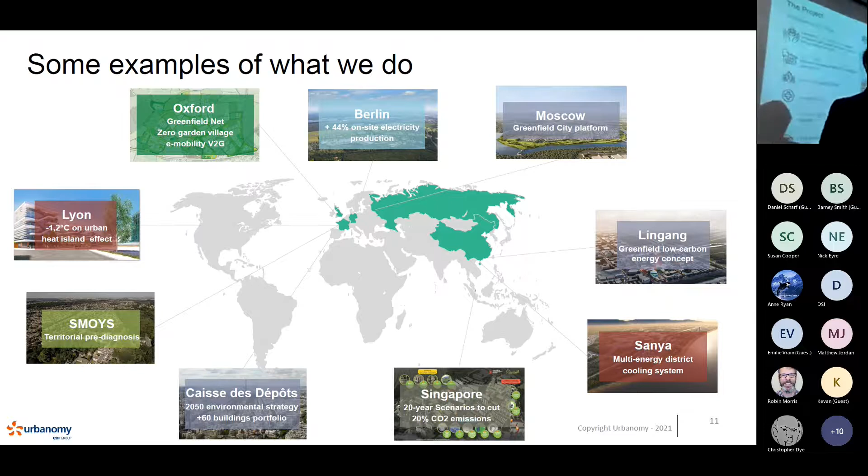So today, I'm going to talk about this Salt Cross Garden Village project, which is a great development in Eynsham, in West Oxfordshire, which is part of the Smart and Fair Futures, which is led by the Low Carbon Hub as part of the LEO project. This project is going to be 2,200 new homes. It's going to be mixed use with also 2 schools, a health center, a large-scale science park, so 40 hectares, and beside the development, there will be also park and ride to support the connection with buses and public transportation on the A40.

The ambition of Salt Cross Garden Village has been driven by West Oxfordshire District Council through a draft area action plan, which is under review and validation at the moment. The ambition is really to make it a net zero development, so to have low energy use in the building, to maximize the production of local renewables, and as well to have zero fossil fuel burned on site.

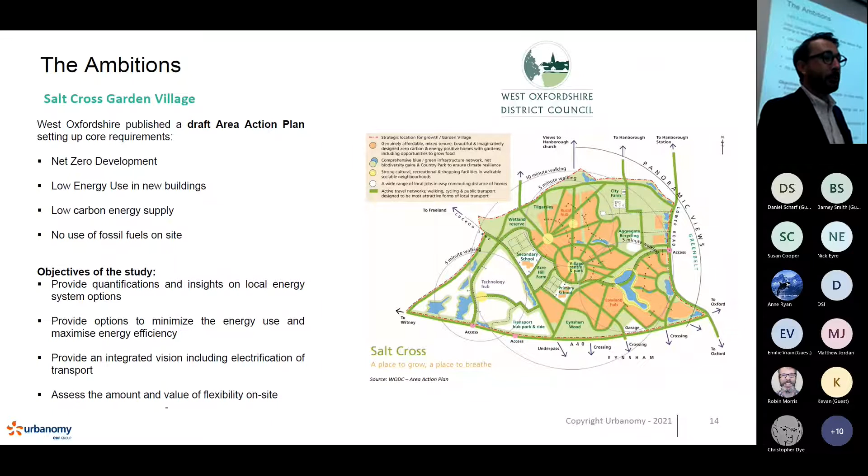The objective of the study is then to provide some insights and quantifications to achieve this objective through various options on the local energy system, to provide options to maximize the use of local renewables, and to develop efficient building and mobility solutions, low carbon solutions, and to assess the amount of flexibility that we can get through various assets on the site. The idea is really to look at the whole value chain of energy and mobility at this early stage of the development, to provide all the insights to make sure that the objective of having a net zero development is achieved.

So this study is part of the Local Energy Oxfordshire, the LEO project that you might know, which is led by Scottish and Southern Electricity Network, and among others with Oxfordshire County Council, the University of Oxford, and the Low Carbon Hub. And as part of this project, the Low Carbon Hub has developed the Eynsham Smart and Fair Futures, which is a project to ensure that the objectives of these developments are benefiting the community and the local environment.

So we've been working with this local group led by the Low Carbon Hub, and also with GreenTEA, so Eynsham Transition Energy Action, who is leading the local group and is very active in the review of the study, and also in the direction given for the study.

Now, to go down a bit to the methodology. This is the overview of the methodology that we've used for this project. So if we start from the top left, we have first assessed the future building energy needs. So looking at high efficiency building fabric and trying to get as much as possible from this early stage. So it means trying to get as low consumption and emission as possible from this stage.

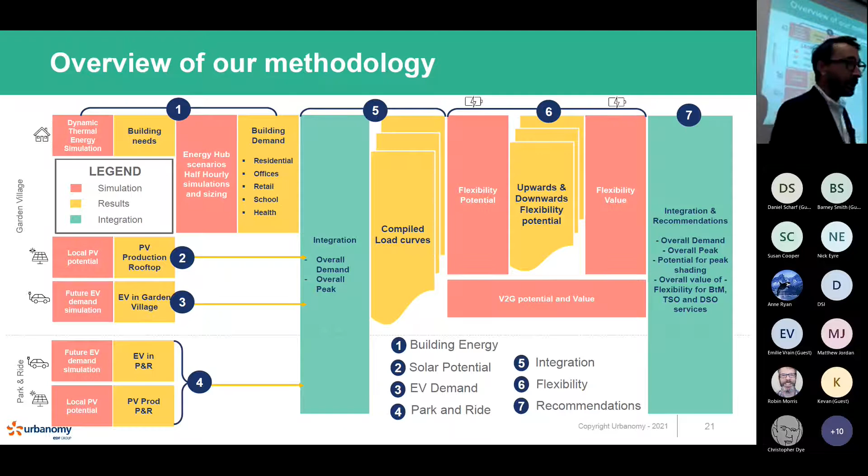Second stage will be to assess various energy hubs. So to cover these needs and to self-consume the energy, we've looked at 3 different scenarios that I will detail later to produce the heat and the electricity for these buildings and electric vehicles. Then from these 3 scenarios, we've integrated all the results to provide a compiled load curve. The idea is to have the overall yearly energy demand and the peak demand to understand what will be the potential impact on the local infrastructure.

And then going to flexibility for various assets. So we've assessed the flexibility in buildings through thermal storage and batteries, and also flexibility from the electric vehicles with V1G and V2G. And we've assessed the value of this flexibility to understand how flexibility can reduce the energy costs and potentially bring new revenues.

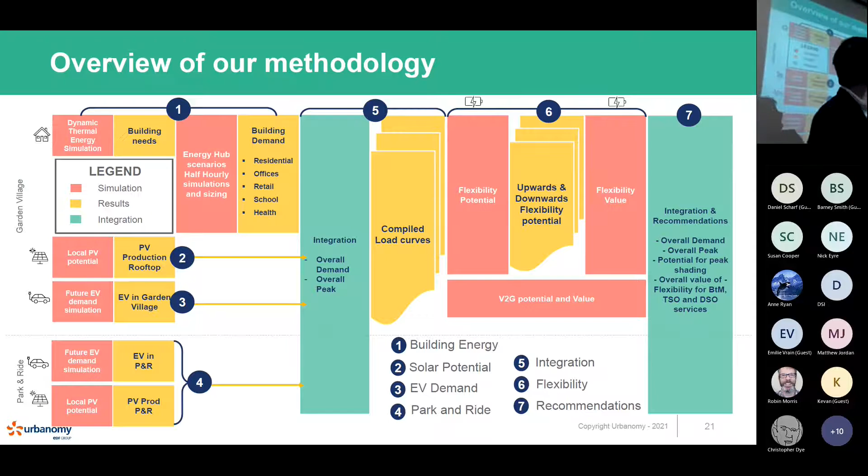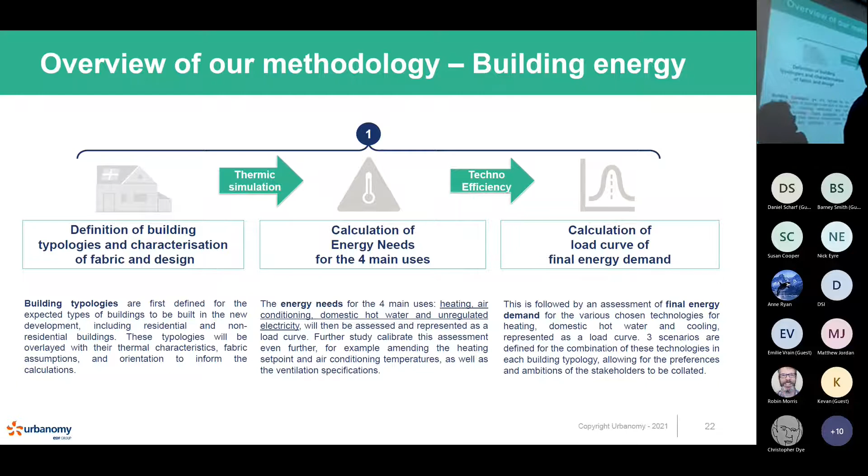So starting with the description of the methodology on the building energy demand. As mentioned, we've started with evaluating the building energy need with the definition of various typologies within the area. There are 2,200 homes with different typologies, so mid-rise and terraced houses, and also several retail, schools, and health centers. Then we've evaluated these energy needs through dynamic thermal simulations and the energy demand with the 3 scenarios that I mentioned earlier with centralized and decentralized solutions.

For the electric vehicles, we've assessed first what will be the need for EV charging infrastructure. So how many charge points will we have in this development, and how much energy will this demand require? We've used several load curves from charge points that EDF is operating to assess real values of the EV demand. Then we've simulated the park and ride, so trying to understand how much the electric vehicle demand will be covered by the solar canopy. And finally, we've done an assessment on V1G and V2G to understand how to optimize the charge of electric vehicles and provide new revenues.

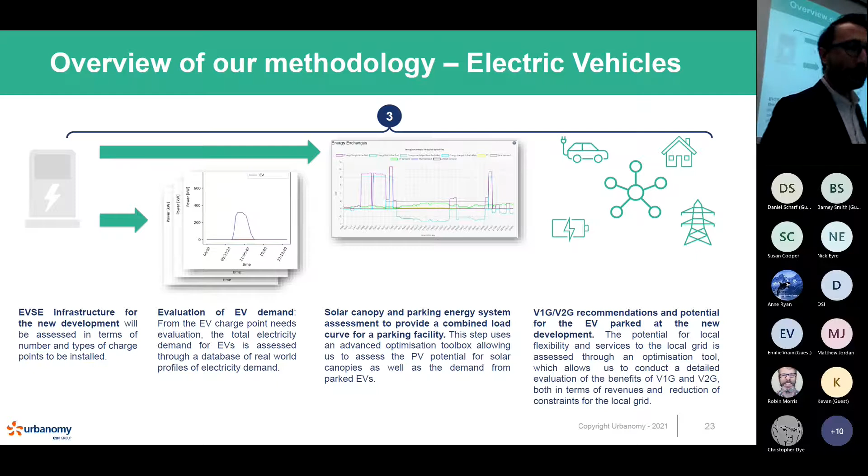Talking about flexibility, we've looked also at flexibility in the buildings using a toolbox that we've used for smart local energy system on several projects. The idea here is to simulate every half an hour how much flexibility we can get from the heat pumps, the thermal storage, and residential batteries, and then quantify this flexibility over arbitrage and various grid services using an optimization tool which is based on the market data in the UK.

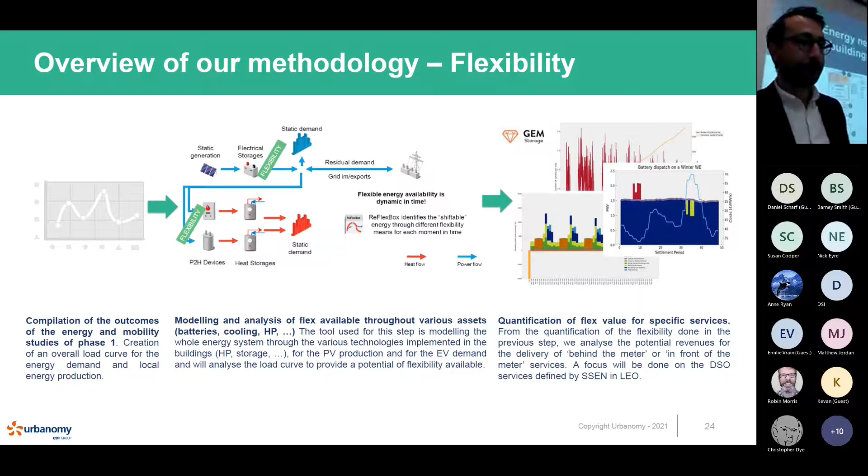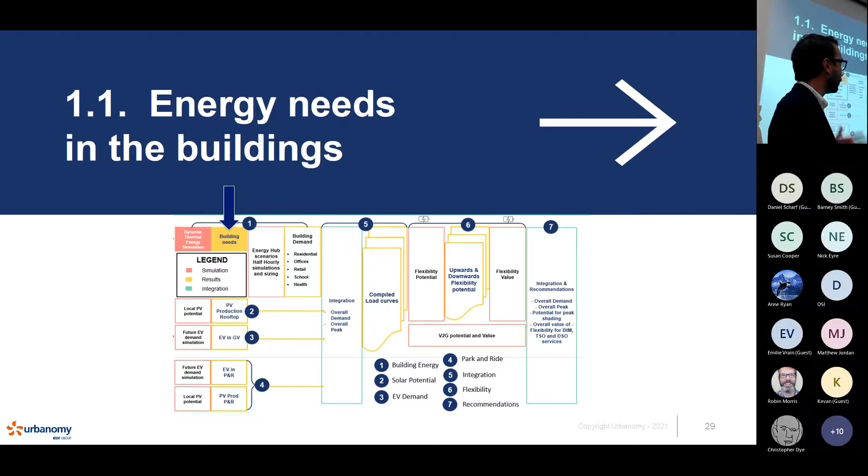So I'm going to go through these various steps, presenting you some results. The results will be evolving as the project evolves, because the design of the master plan will be evolving along the project. So what you see is a snapshot at the moment where we've done the simulation, and obviously we continue to work together with the local stakeholders to ensure that the evolution of the planning is going in the right direction.

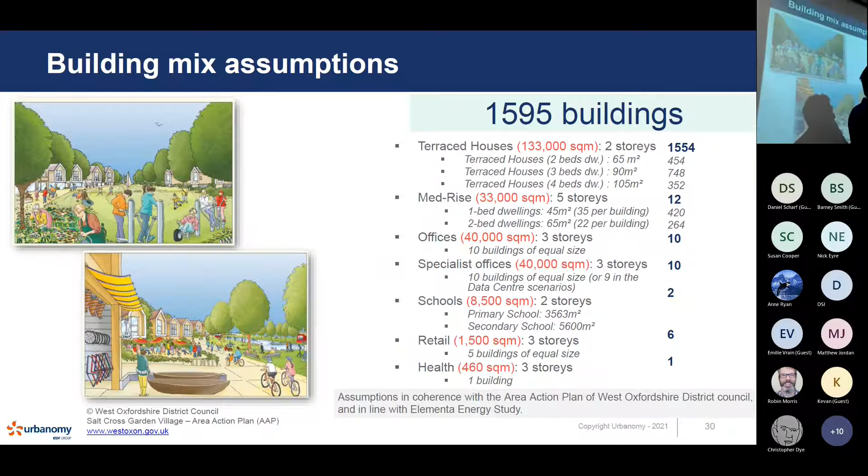Starting with the buildings, we have 1,595 buildings, mainly residential buildings, so terraced houses and a few mid-rise. Some offices and specialist offices. So what is a specialist office? We've separated half of the offices within the science park to assign them to a typology which is a little bit more related to labs and high computing needs. We have two schools, primary and secondary schools, retail buildings, and a health center.

We've worked on trying to get the highest efficiency in the building fabric, so pushing the U values and the efficiency of this building fabric to have the highest standard possible. In terms of heating system and domestic hot water system, we've looked at heat pumps and centralized or district heating systems. And for the modeling, we've adapted also to the UK context to understand how much domestic hot water is used, how much lighting and the various appliances are used in these various buildings.

AC is only used in offices and in the data center. We used semi-instantaneous domestic hot water, which means that we average over every half an hour. The need for domestic hot water is not always a whole half an hour, generally it's 2 to 15 minutes. So we average this, and we take local weather conditions from 2020.

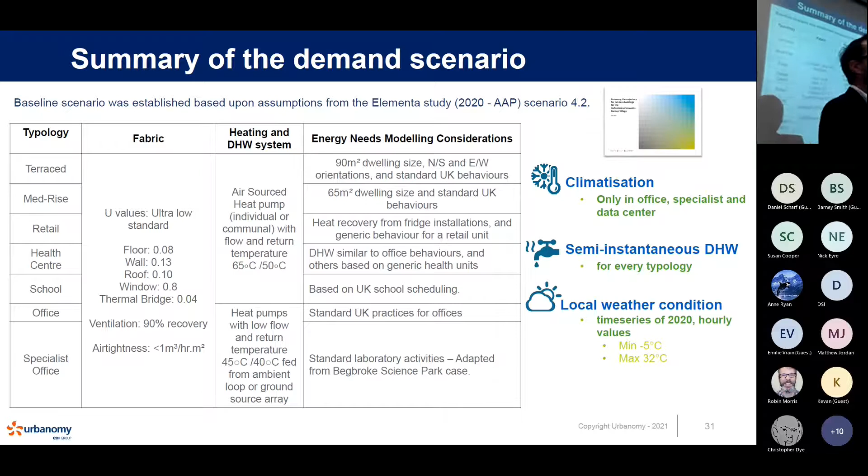We've been aligning our assumptions with the Elementa study, which is a previous study that had been conducted for the West Oxfordshire District Council, to ensure continuity in the studies and ensure that as we detail the studies for this development, we rely on the same assumptions.

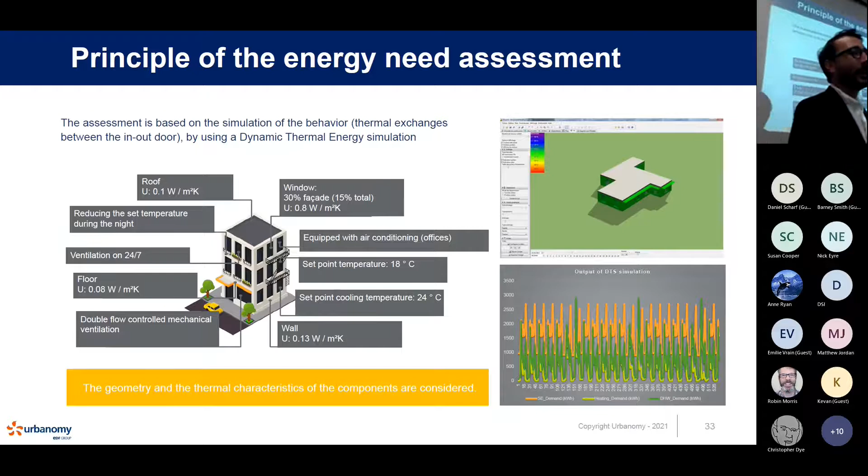For the energy needs, we've produced a dynamic thermal simulation, which takes into account the typologies and the form of the various buildings, the U values and the thermal bridges within these typologies. We've done a simulation every 30 minutes to have precision, and along a whole year to understand the seasonalities of the energy needs. And we come to these results. Overall, we have very low thermal needs. The thermal needs are for space heating and domestic hot water.

So for all the typologies, we are below 15 kilowatt hours per square meter per year. We see that this is the result of the very high standard of the building fabric, so it's a good sign. We see that the unregulated electricity is becoming a significant part of the needs, which was not the case with lower standards in the past. So we now need to focus a bit more on the unregulated electricity and on the efficiency of

the appliances. And one result is that we've done a scenario with a data center, which shows that the building needs for the data center are really high compared to the rest. And we've seen that it has a strong impact. And we'll also explain why we've simulated a data center.

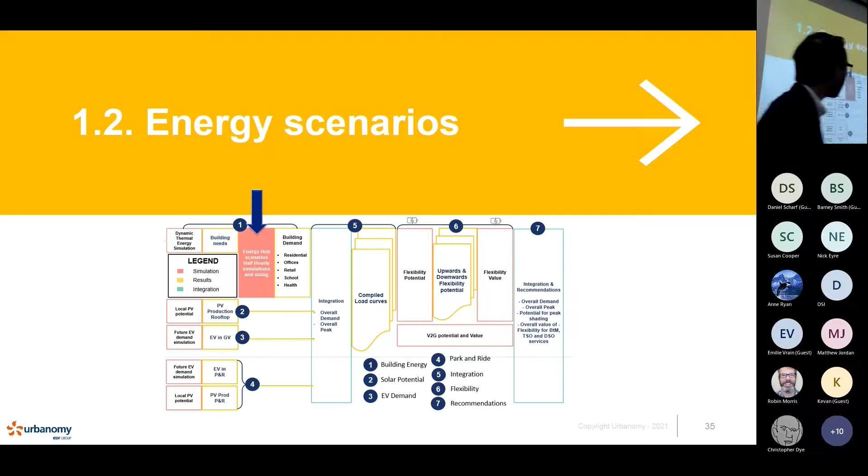So going to the scenarios, we've tested 3 energy hub scenarios: one fully decentralized with heat pumps on each building, one fully centralized with a 4th generation district heating, so a 65-70 degree loop, and an ambient loop at 20 degrees with additional water heat pumps on every building to top up the temperature.

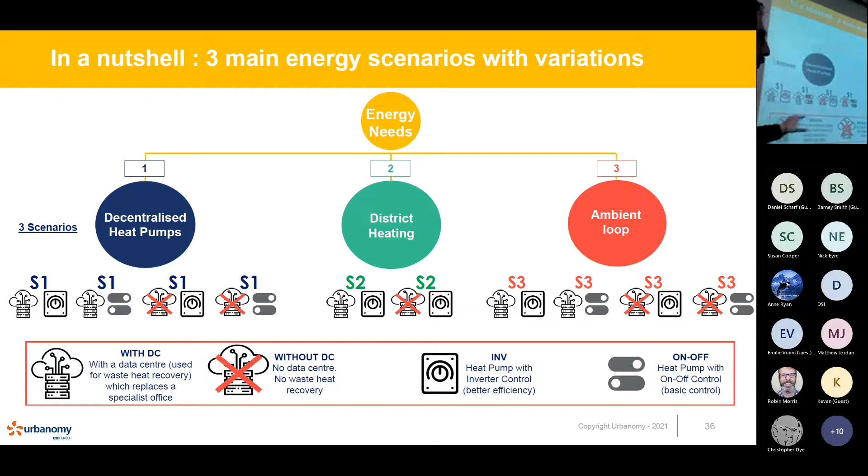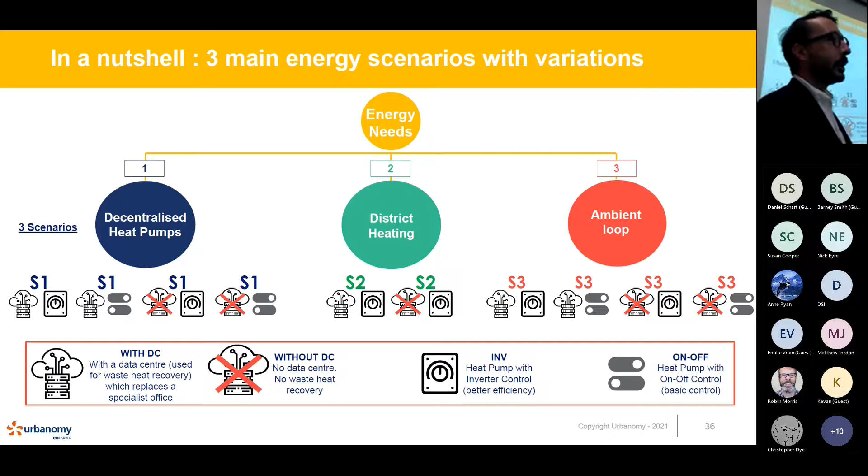We have then tested various options. The data center that I was mentioning. So the option of the data center was to test waste heat recovery from a data center. So is it worth installing a high computing building in this area to reuse the waste heat?

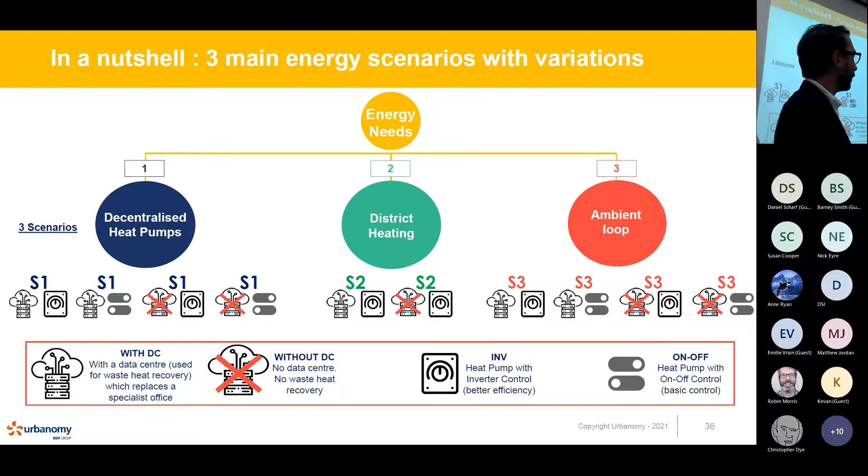And we've also tested two different controls of the heat pumps. The normal one, which is on-off, so the heat pump is running at the optimal power, and one with an inverter, which means that you can ramp up and ramp down the use of the heat pump, which is more efficient, and that we start to see in most, at least, of the air-water systems.

So, a short description of each of the scenarios. The first one is fully decentralized, fairly easy. We have air-water heat pumps for each of the buildings. Remember that the objective is not to burn any fossil fuel on site, so gas boilers or solutions with gas are not an option. We've also simulated PV on the roof of the buildings. We have thermal storage for domestic hot water and charge points.

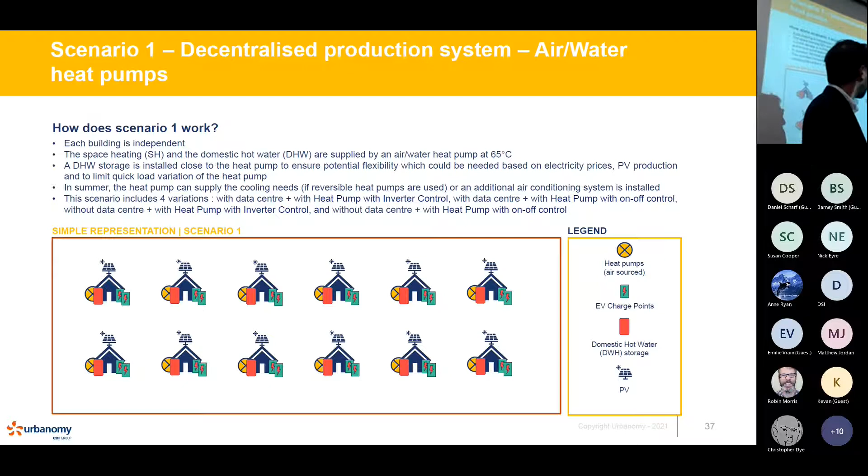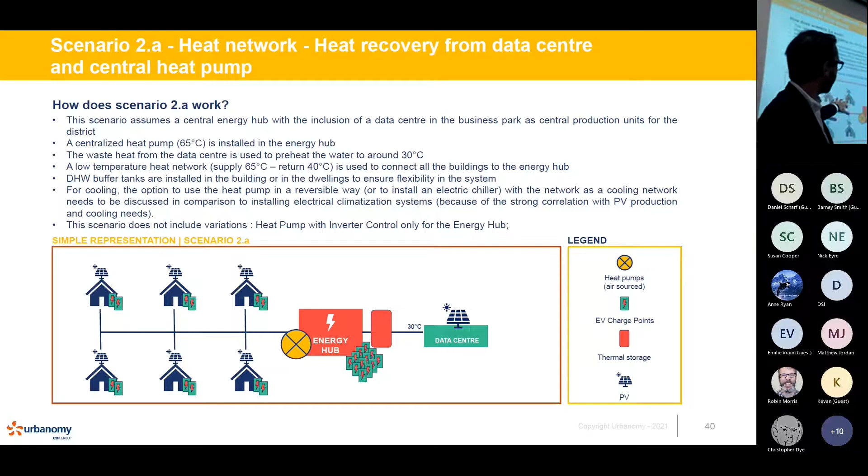The second scenario is the centralized one with a fourth generation district heating network with two options, one with a data center, one without. The data center is able to bring the temperature to around 30 degrees in the network, and then we top up with an air source heat pump, and then we have the same assets for each building with PV and EV charge points.

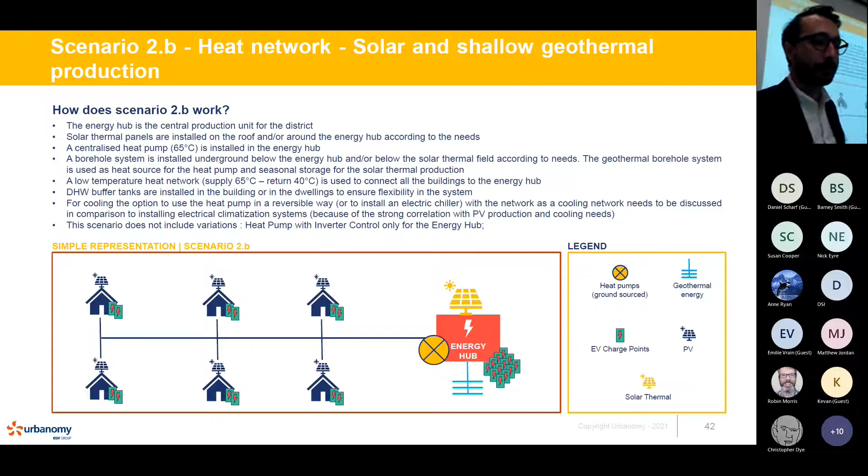The second option for this district heating is a ground source heat pump without the data center. So we take the heat source from the underground, and we add solar thermal to top up the heat in the network. The third scenario is with an ambient loop, so low temperature district heating.

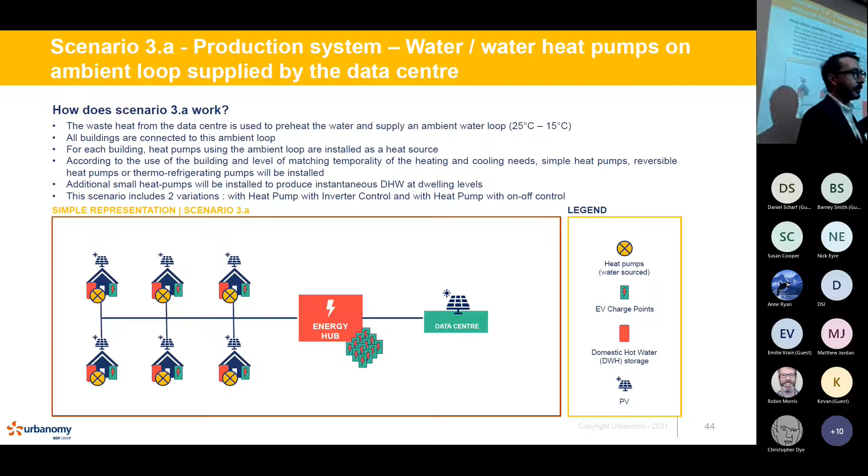The first one is with the data center, so providing the same water at around 30 degrees. And the second option is an ambient loop taking the heat from the underground at around 10 to 15 degrees. We've taken the assumption of around 12 degrees for this one. And water heat pumps increase the temperature up to around 60 degrees in the buildings for domestic hot water and space heating needs.

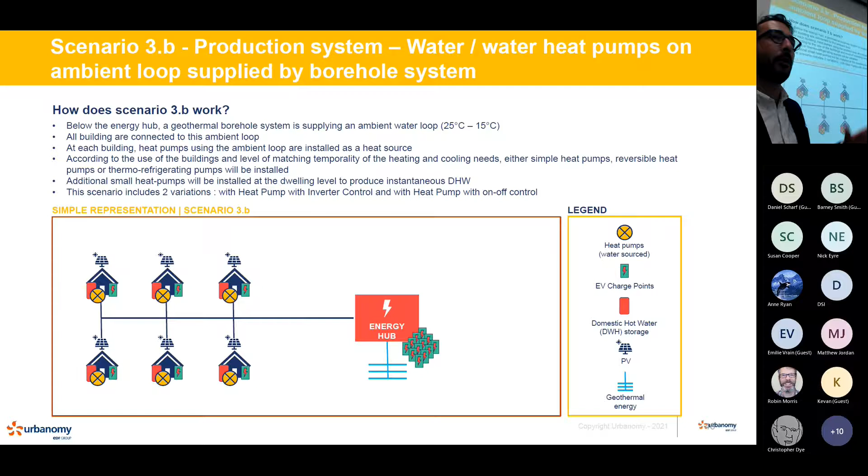The outputs show that the scenarios with the data centers have a higher energy consumption, which means that the efficiency we get from the waste heat recovery is not enough to cover the overconsumption of the data center. Other outputs: we see that the inverter control saves 30 to 40% of electricity for the heat pump, so it's quite efficient. The ambient loop with the data center is also proving quite efficient.

On the other side, the ambient loop with only the ground source heat is not so efficient, because 12 degrees is relatively low, relatively similar to the average outside temperature. And finally, the district heating is showing an overconsumption, so we'll see that later. Basically, the energy needs for this district heating are mainly covering the heat losses.

So the needs in the buildings are relatively low. We don't need a lot of heat because the buildings are fairly well insulated. And it's a large-scale development, so we have a lot of heat losses in the network, which leads to a system that is not efficient and mainly heating to cover the heat losses.

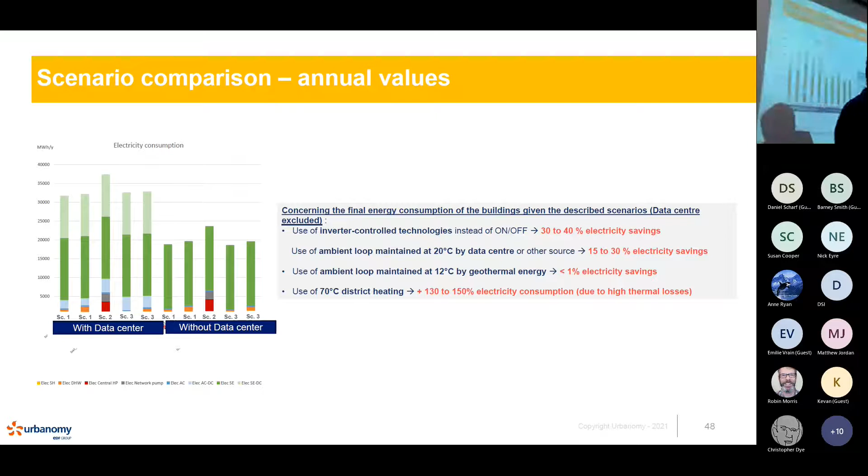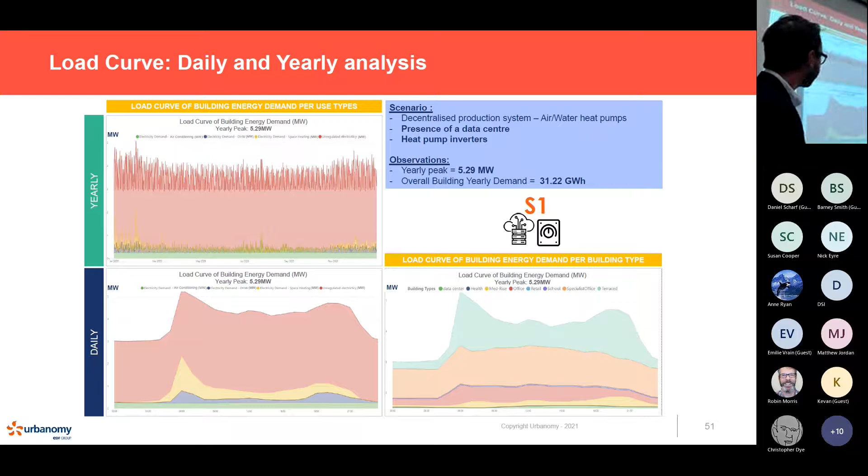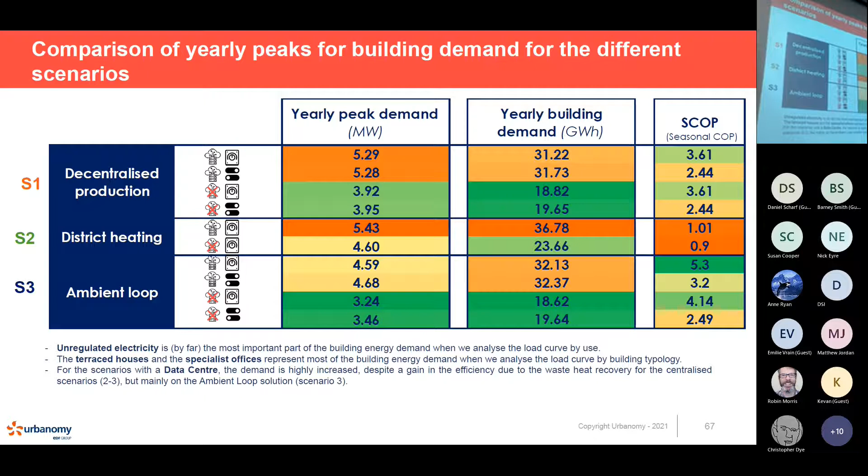Now, the district heating system, as we see, is not really efficient due to these heat losses that I mentioned earlier. We see that the ambient loop, in the case where we have the data center, is providing quite a high seasonal COP because of the use of the temperature at 20-30 degrees, which is quite efficient for an ambient loop. And the decentralized scenario with air source, so air-water heat pump, is also showing quite good results in this case.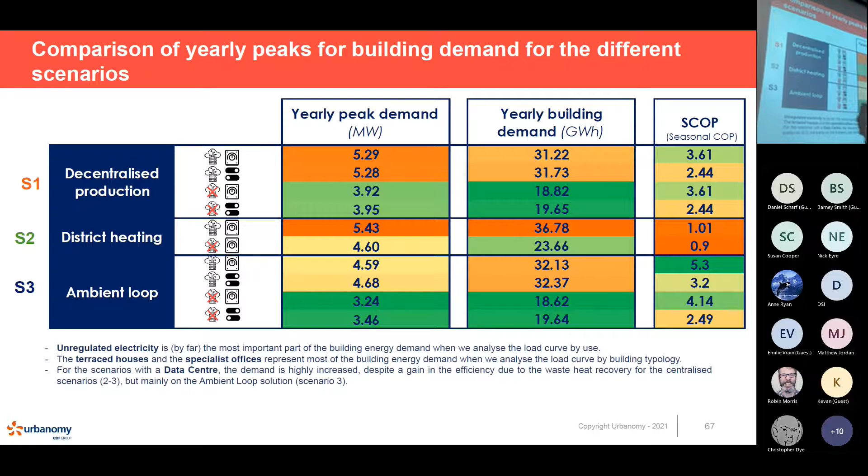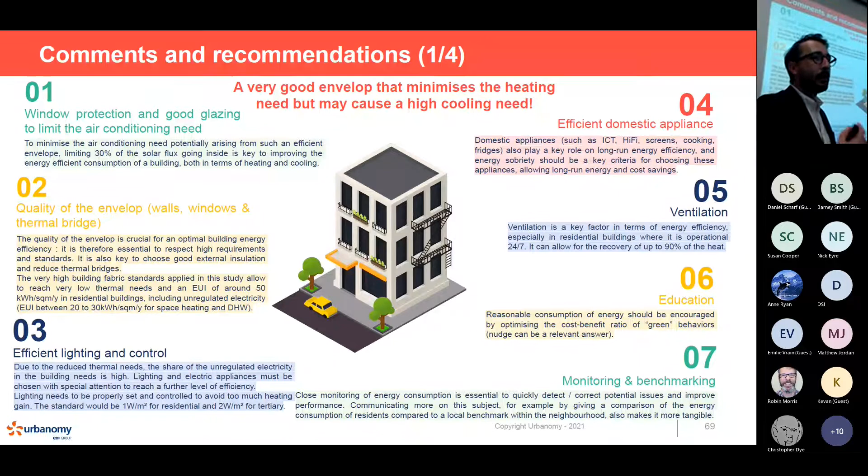So we've provided some recommendations, but I think I've covered most of them, which is mainly to push on the efficiency of the buildings, looking also at the building design, because as we are creating very efficient buildings, we are also potentially creating cooling needs in the summer. So that will be an important thing to look at, adding some shading and coverage for the summer.

And then we've seen that scenario 2, the district heating, might be a bit inefficient in this case. The scenario with the ambient loop is quite good. We could potentially look at having several ambient loops instead of one big ambient loop. That could also be efficient. And in terms of the ground source heat pump and the use of geothermal energy, this is a good system. To improve the system, it would be good to re-inject some heat during the summer to use during the winter, to ensure that along the year the temperature in the ground is not decreasing, which would reduce the efficiency of the system.

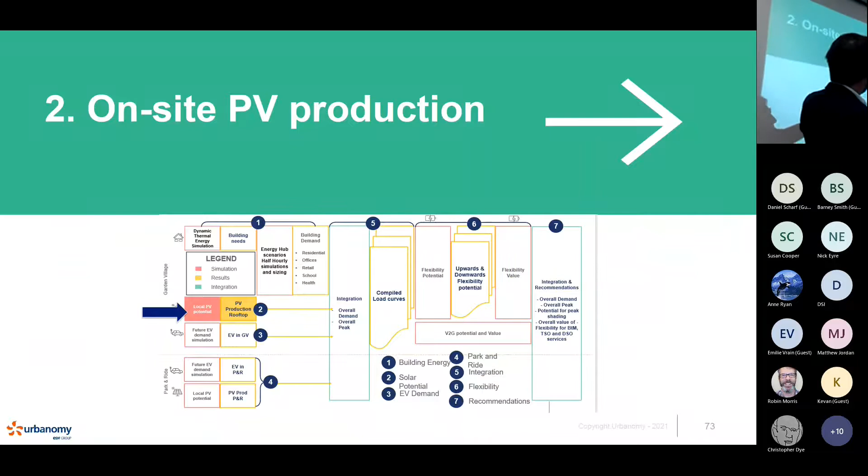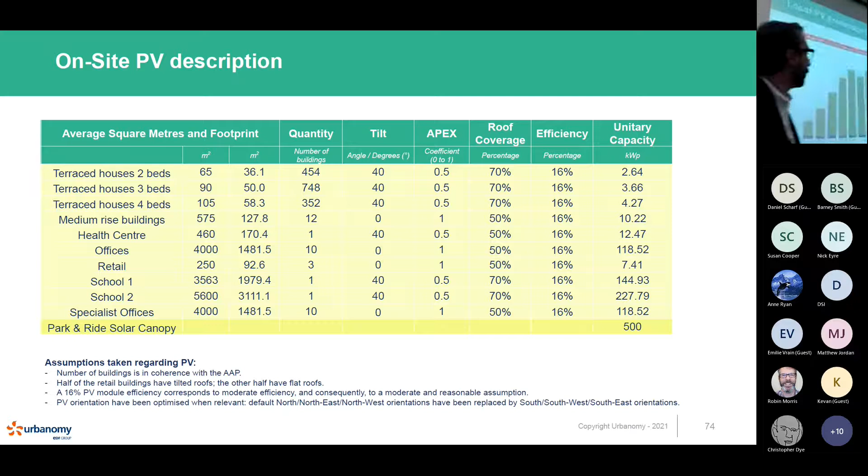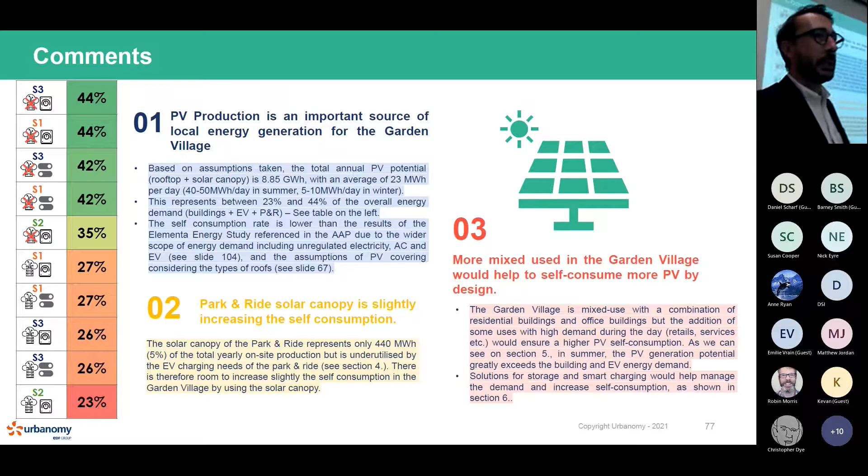Moving on to the local generation, we've looked at rooftop PV for each of the buildings and a solar canopy for the park and ride. We have the generation over the months and over the year for each of these systems, both the rooftop and the solar canopy. And we see that with these setups we can cover up to 44% of the energy needs from the buildings.

Moving on to the electric vehicles. We've looked at how many electric vehicles would be charging in Cross Garden Village. We first looked at how many charge points we would need in the development, so we've looked at the planning documents and how many public parking spaces would be on the site. We then have a total of 2,600 charge points, for which we assign a certain percentage of the vehicle stock to be electrified by 2031, which would be around the delivery of the development.

We have taken the future energy scenarios from National Grid, which are the standard scenarios for the forecast, and we've tested two uptakes of electric vehicles, one with 38%, one with 14%. We first created simulations without any smart charging, which means that people arrive, they plug in, and when they finish charging, the charge is finished. Or if they depart before the end of the charge, then we cut the charge.

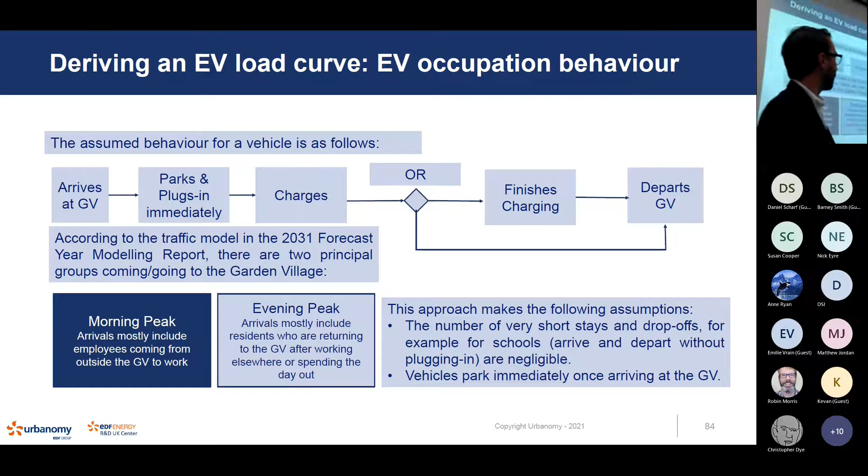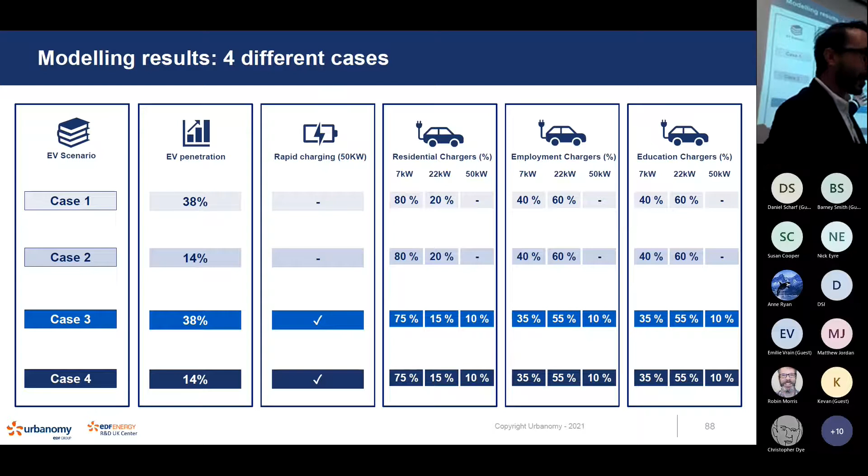We have mainly two peaks, one in the morning and one in the evening, and we have assessed various uses, one for residential charging and one for employment charging. So we came up with these four scenarios, with two penetrations of electric vehicles, and whether or not we would implement rapid charging on site, 50 kilowatts.

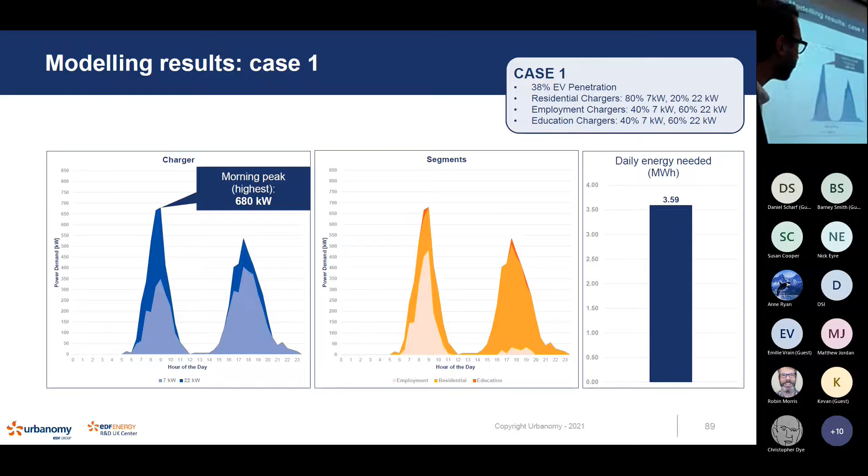So we've done that for all the scenarios. They mainly look the same. The morning peak is the highest in most of the cases. Conclusion for the EV: it's increasing the demand, but not drastically, so around 4 to 8%. It's increasing the peak. It can increase the peak up to 17%, but in the scenarios that is maybe not the most efficient. So it doesn't mean that it would have a negative impact. And then morning peak is the highest.

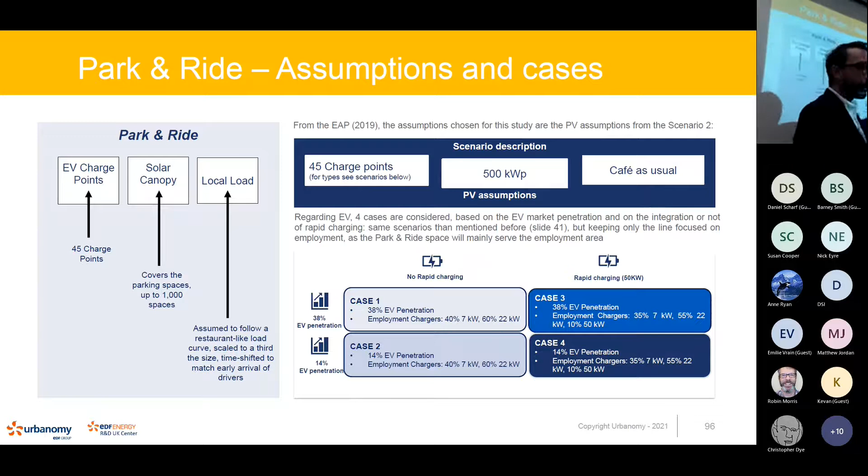Looking at the park and ride, that's the latest design of the park and ride that we've studied. The park and ride will be providing 1,000 parking lots with 45 charge points. We've simulated a solar canopy of 500 kilowatt peak, and a local load, which can be a cafe, amenities, or something that can be installed on the park and ride. We've tested the 4 use cases, the same as what we've had for the EV, to be able to compare that. And we've looked at the net profile, so how much would the PV and the solar canopy cover in terms of both the local load, which is very small, and the EV charge points.

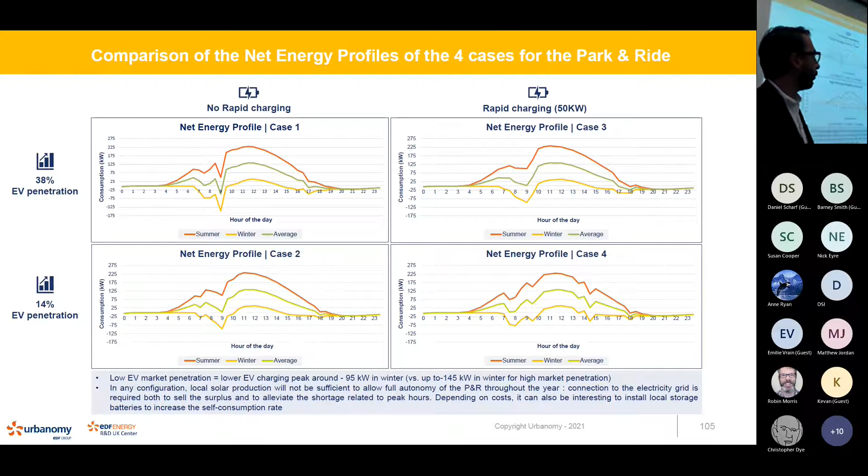We see that in most of the cases, the PV production is higher than the demand. It doesn't mean that it's the case at every half an hour of the day. So at some point we need to import, especially in winter. The 3 colors are winter, summer, and average. So we see here the need, in some cases, for smart charging, because if we could shift a little bit the load, then we would have the possibility to really self-consume more from the PV and export less. So that's the EV load curves.

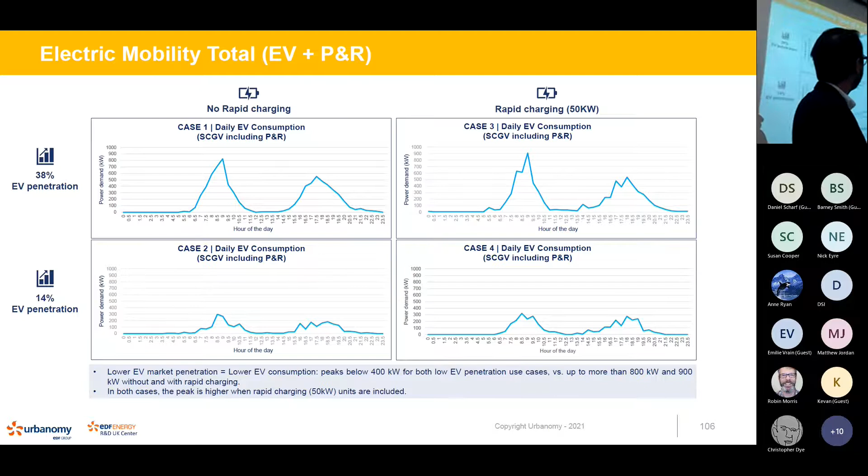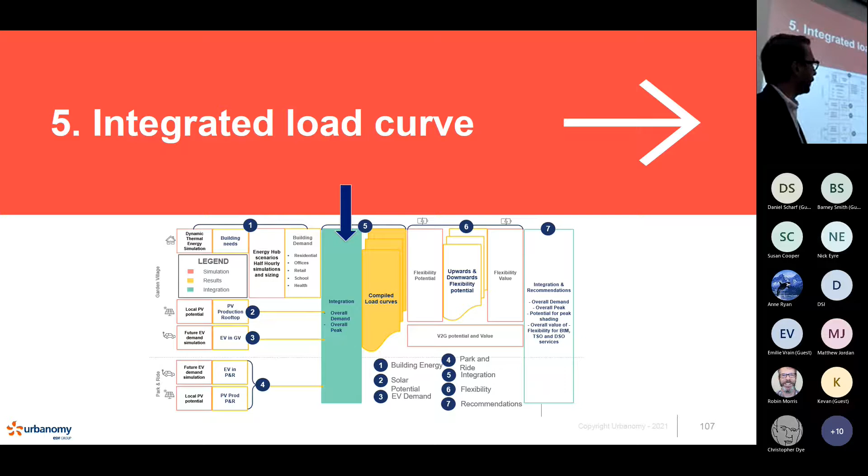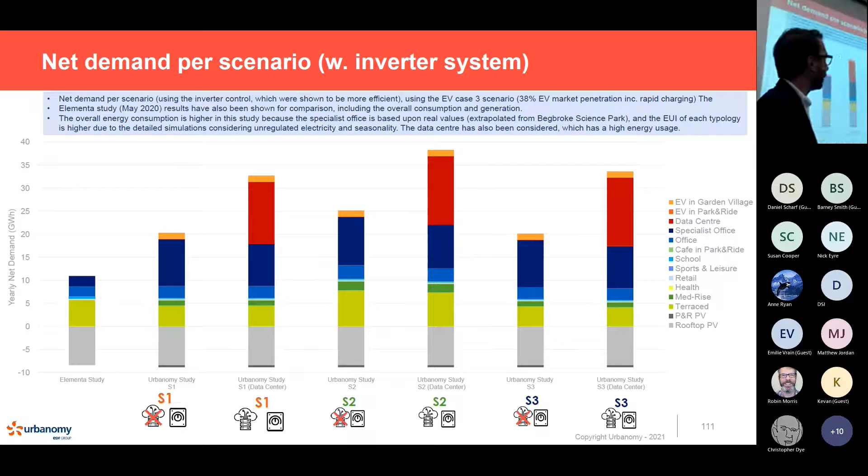So now we have done this first step, which is looking at all the assets, finding energy hubs that are providing the best efficiency in the system, and we've combined that to provide the comparison between the various scenarios. And we've compared also with the previous study to have a validation. I will come to that. What we see is that in red you have the data center, so you see that it's really increasing the need. So it might be more efficient to actually not develop a data center just for the sake of having waste heat recovery, but maybe rely on the specialist office, which will also have computing and cooling needs for this area. We see again that scenario 1 without the data center and scenario 3 are the most efficient in terms of overall energy demand. We'll see later also in terms of peak demand.

And in terms of validation, we've compared with the previous studies that have been done. We see that in terms of local generation and residential buildings, we are in the same order of magnitude. We've added the park and ride local generation, so that's the PV. And in terms of offices, the specialization that we've done with the specialist office, we've taken that from the Begbroke Science Park data. So we've had access to real data that would allow us to have something that is similar to the reality. And the addition of the EV demand, which is increasing a little bit, but it's not massive either.

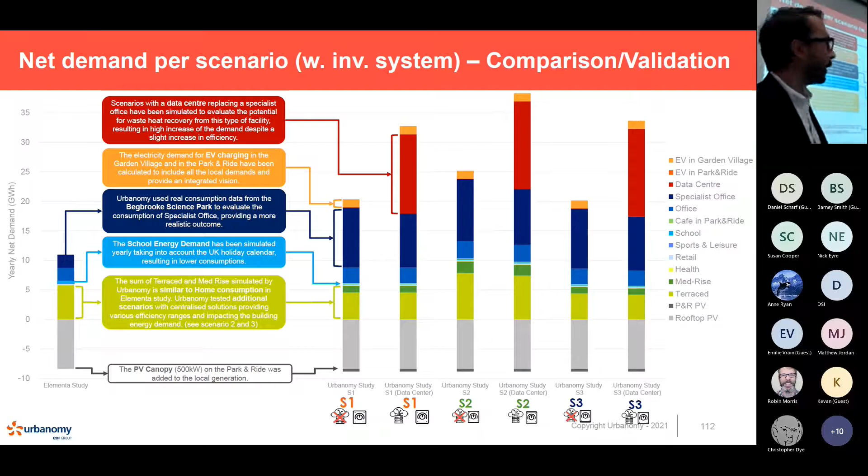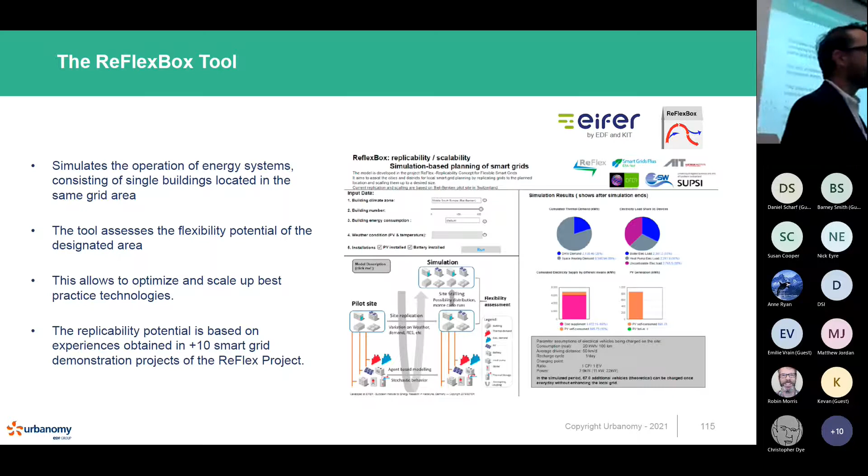Moving on to the flexibility. We've used a tool that is able to assess flexibility every half an hour for the whole year for residential batteries, for the heat pumps plus thermal storage, with different sizes of thermal storage. And we'll see also later with V2G, so with the batteries of the electric vehicle. This tool, called the ReFlexBox Tool, has been developed with a European project that we have adapted for this project. It has been tested on more than 10 smart grid projects, so something that is fairly validated.

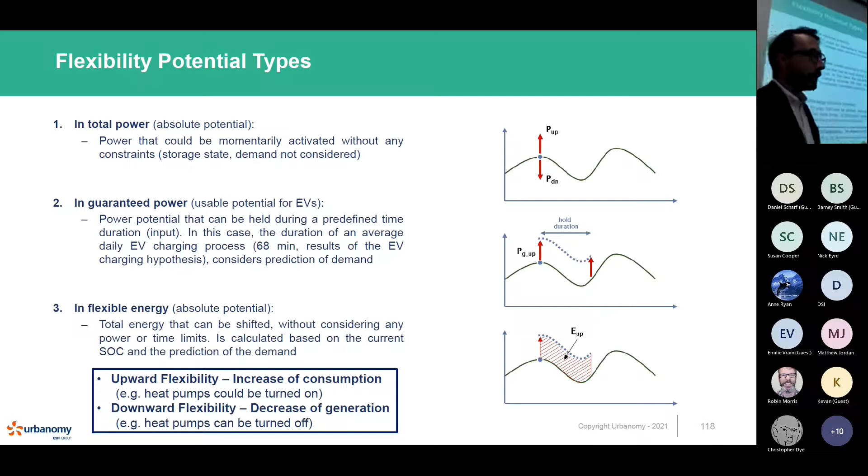And we have assessed various flexibility. The first one is the total potential, so at every time, how much power can we ramp up or ramp down. The guaranteed power, which is sustaining an upward or downward flexibility for a certain amount of time. In our case, to be able to compare with something a bit more tangible, we've used a charge of an electric vehicle with a 7 kilowatt charge point during 68 minutes. And finally, the flexibility in energy, which is basically the amount of energy that you can get when you sustain this flexibility during a certain amount of time.

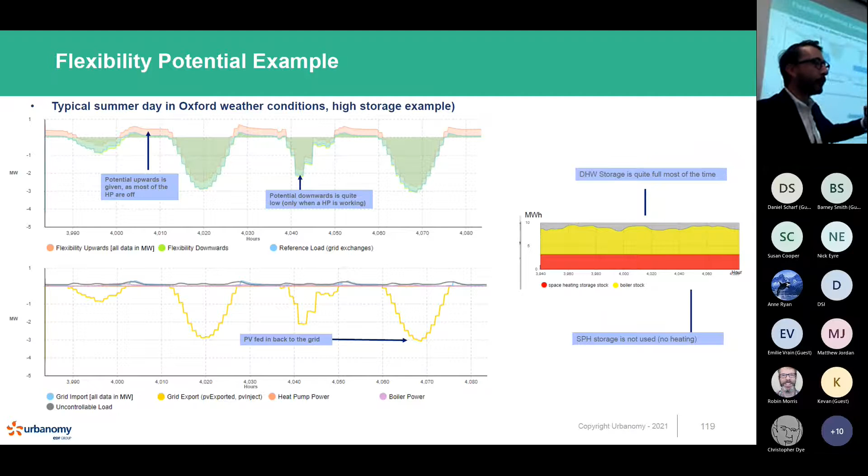So this is how it looks. Quite classical: we have the flows of energy for each half an hour, and we are looking each time at how much upward and downward flexibility we have for the assets that we are testing.

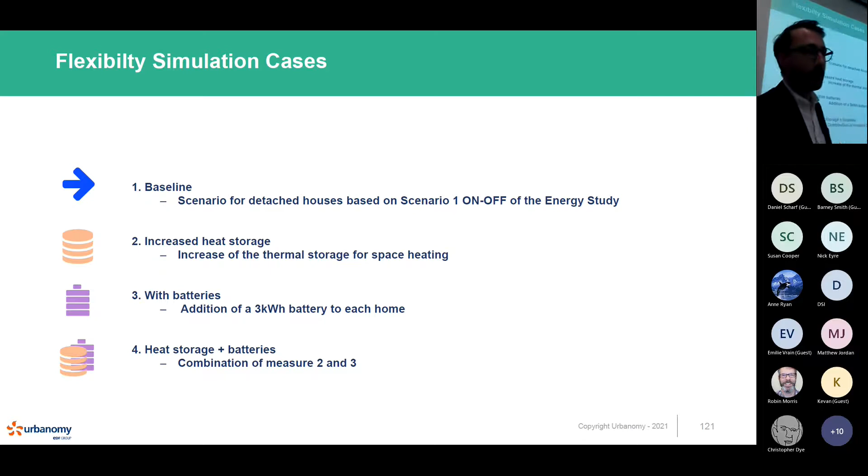We've tested 4 use cases: baseline, which is without any changes. The first scenario of flexibility is increased heat storage, so instead of having a 50-liter thermal storage in the houses, we've tested with 200 liters. The third one is with a battery, a 3 kilowatt hour residential battery in each of the dwellings. And the last one is combining the heat storage and the battery.

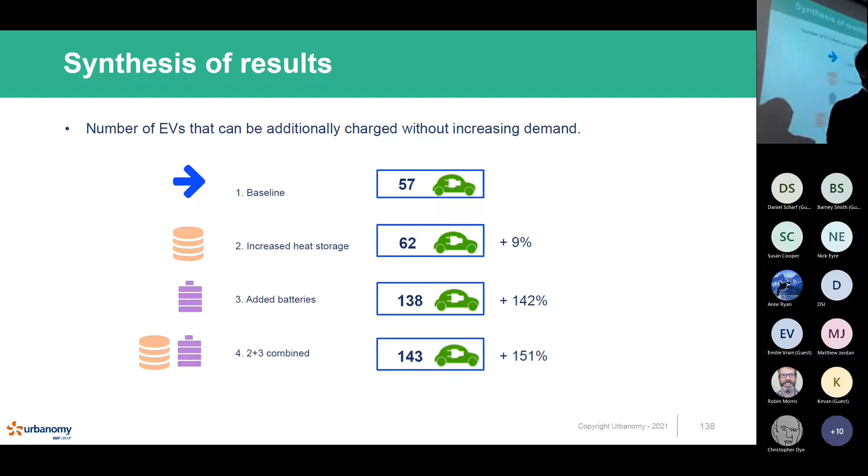The batteries, on the contrary, are bringing quite a good amount of flexibility, so we can increase by 142% the amount of charging. And combining both is obviously also something that is mainly driven by the battery here.

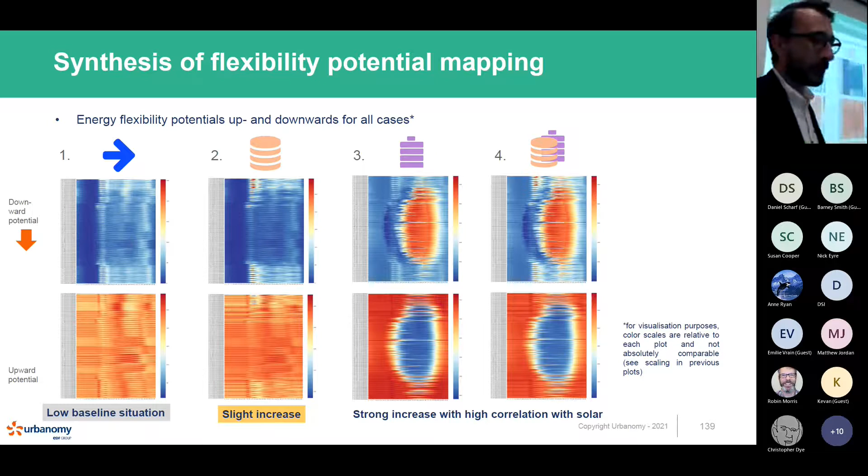Quick overview of the heat map for the flexibility. It's not very readable, but just to give you an idea, we see here the morning peak and here the increased flexibility for the thermal storage, which is mainly driven by domestic hot water and the morning peak of heating. For the batteries, we have this flexibility here up and down, mainly during the summer at midday, which is driven by self-consumption of solar PV. We don't have the scale very visible here, but we see that the potential is quite high also with the batteries.

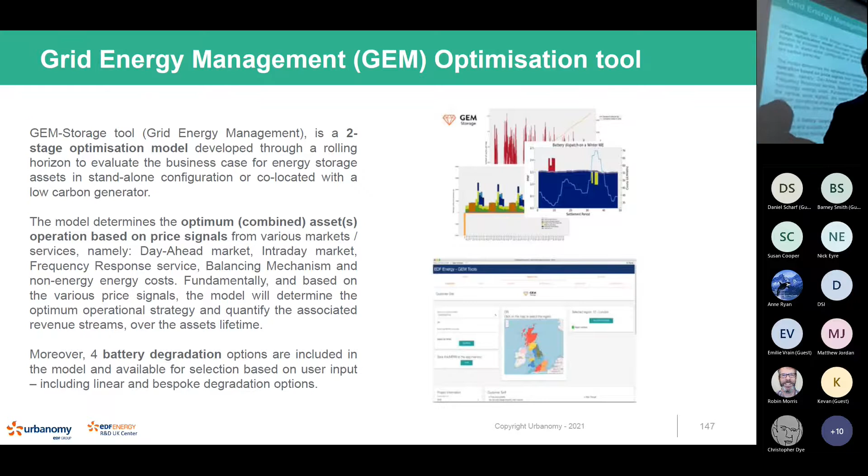Moving on then to the revenue. We've assessed how much we could get from this flexibility using an optimization tool called GEM, Grid Energy Management, looking at different services. The main services are arbitrage, non-energy cost optimization, and DSO and frequency response. Frequency response is very classic.

The DSO services I'm going to describe a little bit, because as we are part of Local Energy Oxfordshire, the LEO project, which is led by SSEN, we have the chance to work with them to understand what will be the value and the structure of these future services. As described today in LEO by SSEN, it's an availability between 4 and 8 p.m. in the evening, with half an hour slots in which you can provide a utilization period, and you get paid for both the availability and the utilization.

We've done the assessment for a 3 month period, so 60 days of availability, with a certain amount of utilization period, and we come to the value of the services, which is 1.25 pounds per megawatt per half an hour.

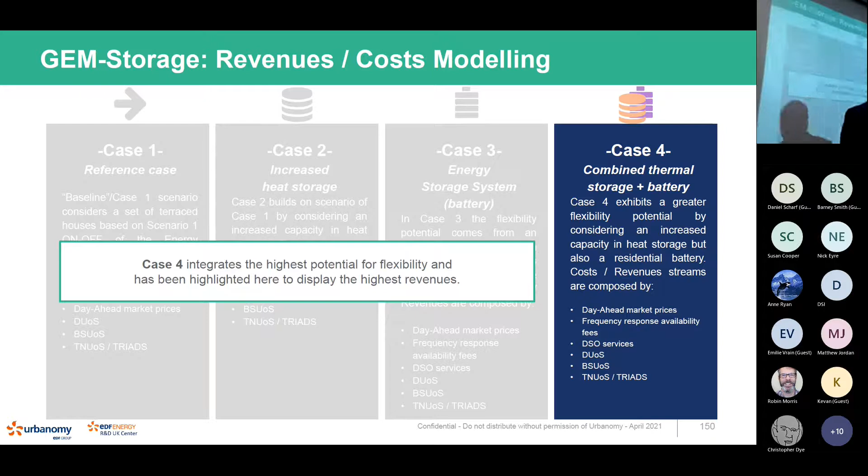I'm going to show you the results for the case 4, which is the most promising in terms of flexibility. We've done the assessment for all of them, but basically the case 4 is combining thermal storage and batteries. So this is the one where we will have the highest revenues.

Quick overview of the wholesale price and the energy costs. So obviously the non-energy costs are quite high during the period of the evening peak, which will come in competition with the DSO services. We'll see that later. And for the frequency response, we've tested 3 values of the services at £4, £6, and £10 per megawatt per hour.

We've tested also different market conditions, one average and one favorable. We see that for the whole development, for each day, we can get, let's say, between 75 and 142 pounds per day for the whole development, which is again looking at the 1,500 terraced houses. So here it shows a little bit the example of the load curve and how we use the flexibility.

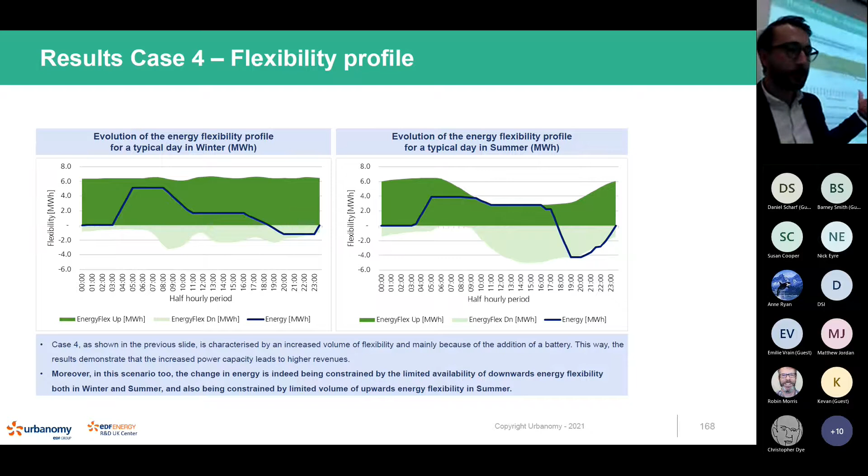But coming to the services, for the DSO services and the frequency revenues, we see the DSO services able to increase a little bit the revenues, where the frequency response in summer and in the favorable conditions are bringing a bit more value, keeping in mind that there are also opportunity costs, because we are not able to bid on the DSO services and do arbitrage at the same time.

And the value of the arbitrage during the windows of the DSO services is the highest. So we saw that the non-energy costs are also the highest at this time, which means that we will have a competition between arbitrage and these in-front-of-the-meter services.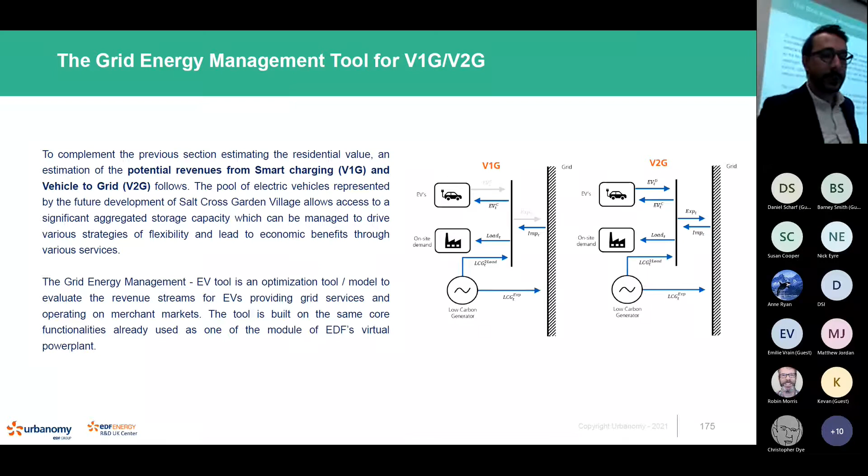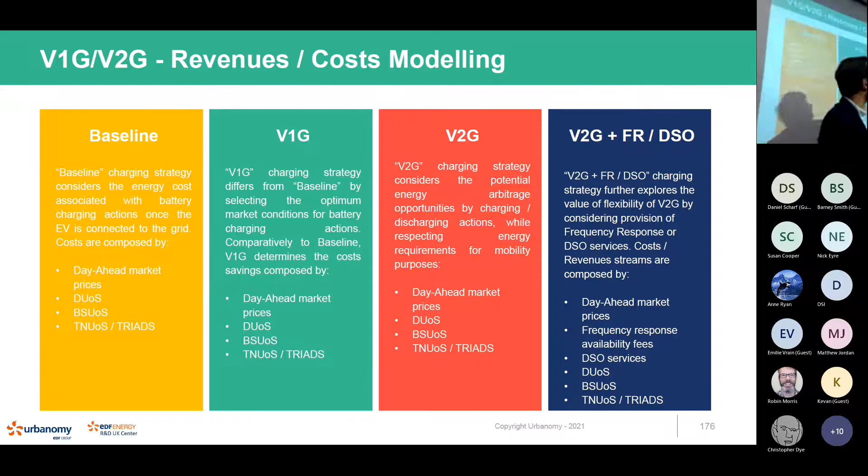Moving on to V1G and V2G, so looking at the flexibility from the electric vehicles, we've used also this same type of optimization model, but adapted to the electric vehicles. This tool has been used to assess 3 use cases below the baseline. First one is V1G, where we shift basically the demand. The second one is V2G mainly to do arbitrage, and the third one is V2G with frequency response and DSO services.

We've tested that on all the scenarios. I'm showing here the case 3, which is the most promising, which means we have a high penetration of electric vehicles and rapid charging. So this is where we have the highest potential for flexibility with the batteries of the electric vehicles. We see here the typical profiles for V1G.

We see that the charging mainly happens during the night, so we shift the need during the day to have it during the night. And for V2G, it's more or less the same, so we have the shift during the night, but we have also charge during the day to use the PV generation.

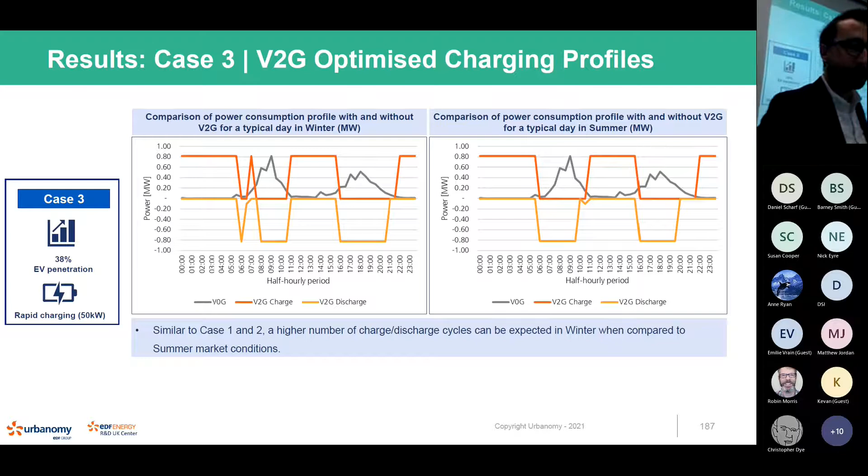In terms of outputs, we have here winter and summer case. So we see that the highest costs are in winter, but it also means that we can have higher revenues because the non-energy costs are higher in winter. In the case of V1G, we can shift roughly 50% of the cost of charging.

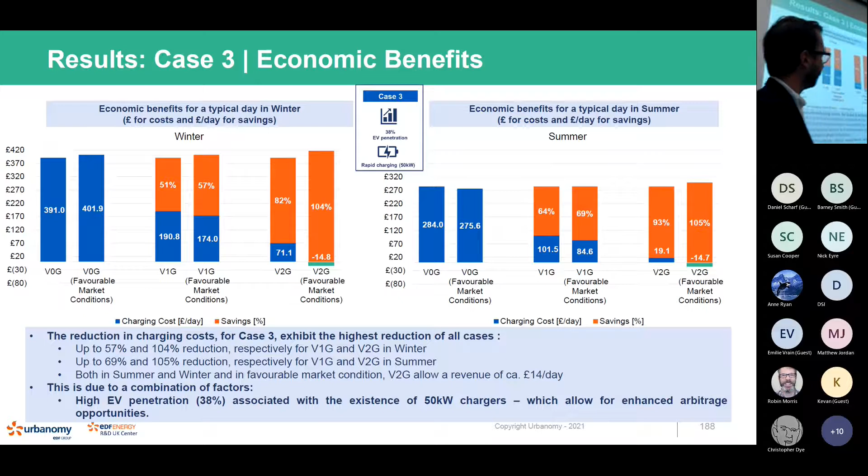And in the case of V2G, in the most favorable cases, we can cover all the charging costs, and have also small additional revenues that come on top of covering the charging costs. This is for arbitrage, and I will show you also for the DSO and frequency response, which are in the same way adding a little bit of revenues, keeping in mind this competition with the opportunity costs.

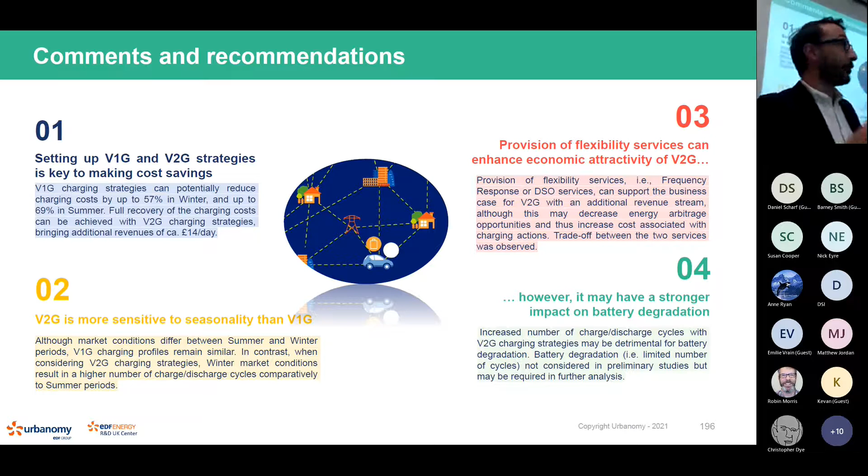So V1G and V2G are definitely something that can help cover the extra charging costs that we have for the electric vehicles. It's something that is also fairly well tested now, so it's relatively mature. The point is to aggregate all the charge points and ensure that we can do that smoothly.

And I will finish with a few overview slides. I hope you can see. Well, basically, I'm going to explain a bit the conclusions here. So you have here the three scenarios. First one, fully decentralized heat pumps. Second one, district heating. Third one, ambient loop.

We can compare here the energy demand and the peak. So you can't read here, but we have the peak. And we start from the left to the right. So the first column is basically the assessment with basic on-off heat pump control. Then moving to the second column, which is the gains we can have by switching to an inverter system.

So we see that we can reduce the demand by 4 or 5%. Then moving to adding the transport, so we add between 4 and 8% in terms of energy consumption. And then moving to the renewables, so when we subtract the renewables that we can self-consume on site, we get the reduction. We see that then we've studied the flexibility for this scenario.

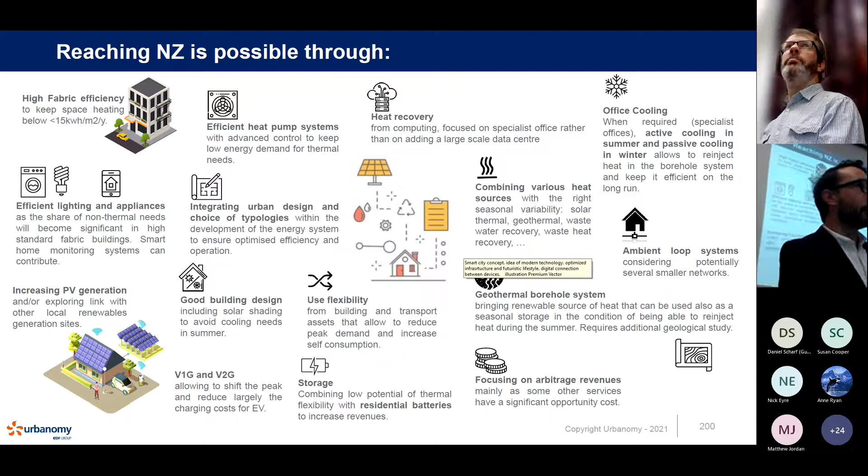So that's the overview, and to finish, I will give some overall recommendations for this development. So this development can reach net zero and be net zero with the high building fabric standards that we've discussed. Looking also at the appliances, we've seen that the unregulated electricity starts to have an important share in the building needs. It's possible to increase also the PV generation. We've looked only at the rooftop and the park and ride, but there is room to increase also this local generation.

The efficient heat pump system brings a good added value. So looking at inverter control for the heat pump is quite a good idea. Looking also at integrating the urban design and the choice of the typologies and a good building design. So we've seen that, for example, the fact that it's very well insulated can create cooling needs in the summer.

So looking at the building design and potentially looking at the integration of the urban design for the district heating solution. We've seen that there is a lot of heat losses. It might be also a good way to reduce the heat losses if we maybe optimize the urban design.

V1G and V2G, well, we've seen that it can cover the cost. So V1G can cover around half of the cost of the electric vehicle charging, and V2G can cover most of them. For the use of the flexibility, there is a potential. We can look at arbitrage first, which is, let's say, an easier way, but to support the local infrastructure, looking at DSO services is also a good idea.

The geothermal energy is bringing an additional heat source, but it would be a good idea to look at combining various heat sources. So we've looked at the data center. It's a bit too much. If we don't necessarily go for a big data center, we can use the waste heat from the specialist office, add some solar thermal, and look at any other heat sources that could top up the temperature of the centralized scenarios.

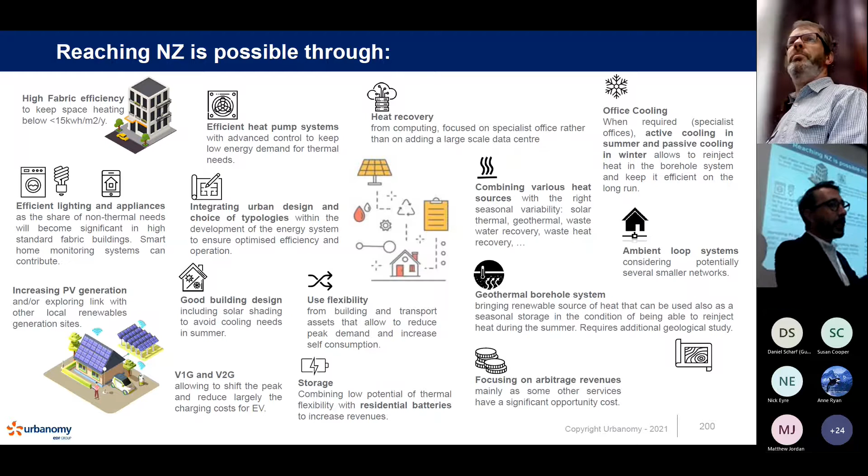Looking at the energy hub, we've seen that ambient loop can be also a good solution, looking potentially at splitting into various ambient loops instead of having one big system. And that's me. Thank you.

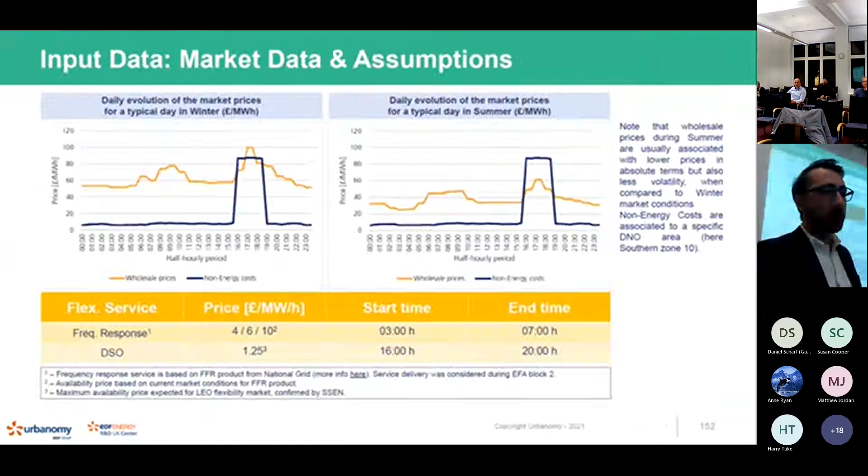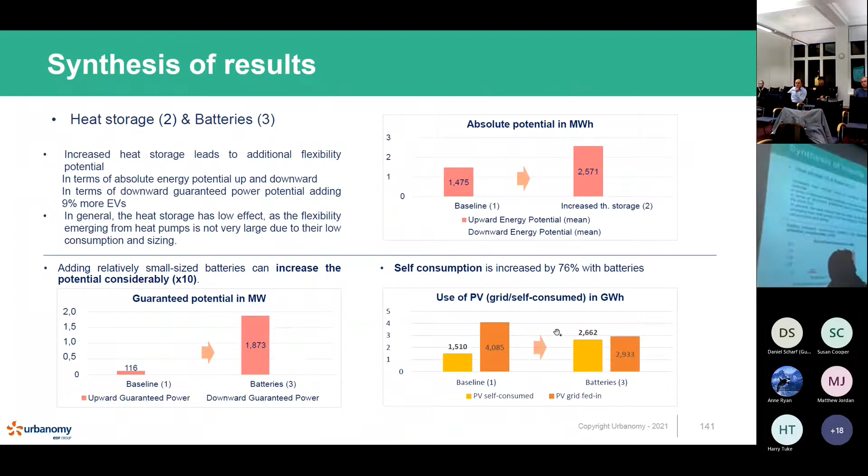And another question in the room here, please. With batteries for residential, do you know what the reduction is? Was that based on like a 3.8 kilowatt hour battery? Yeah, 3 kilowatt hour. How would that improve self-consumption typically, would you say? Yeah, so we can get an additional 1 gigawatt hour of self-consumption. So in the baseline we have self-consumption of 1.5 gigawatt hours, and we get the rest from the grid. In the case of batteries, we have almost half, so we can increase the self-consumption quite significantly. Okay, thanks. That's good.

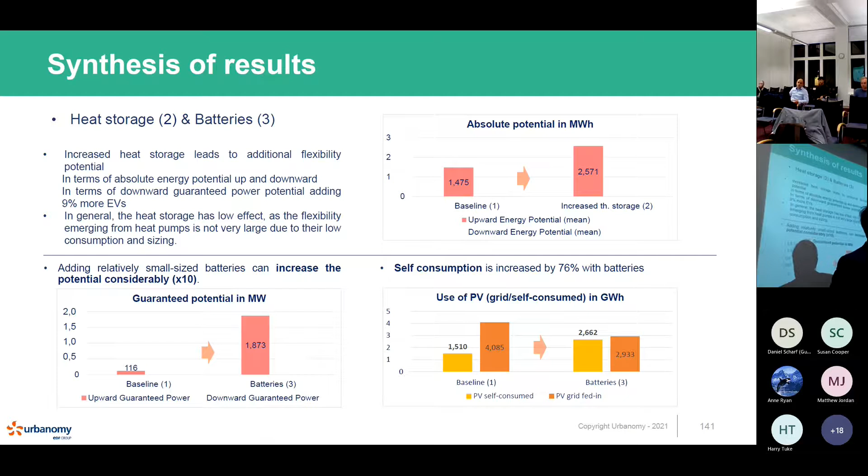David Wallom, are you available to turn your camera on? Yes. Thank you, David. Hello there. Hi, David. Hiya.

Yes, so I noted that within your presentation there were numerous instances around physical modelling of buildings and everything else. But it's been shown numerous times that as soon as you introduce the people into those buildings, the energy modelling is very often shown to be quite off. I also saw that you don't mention anywhere the uncertainties in any of the calculations around demand generation. What level of uncertainty are you actually working on within this plan?

Yeah, that's true. So I'm not showing the uncertainty here. I don't have the figures in the top of my head right now, but we've tested the energy needs simulation several times and tried to match also values from statistical data to be as close as possible to a realistic simulation, knowing that we push a lot the efficiency of the building fabric.

So today there are not so many buildings that are actually having this level of efficiency. So it's not easy to be sure that the simulation is going to be the reality when these kinds of homes are actually built.

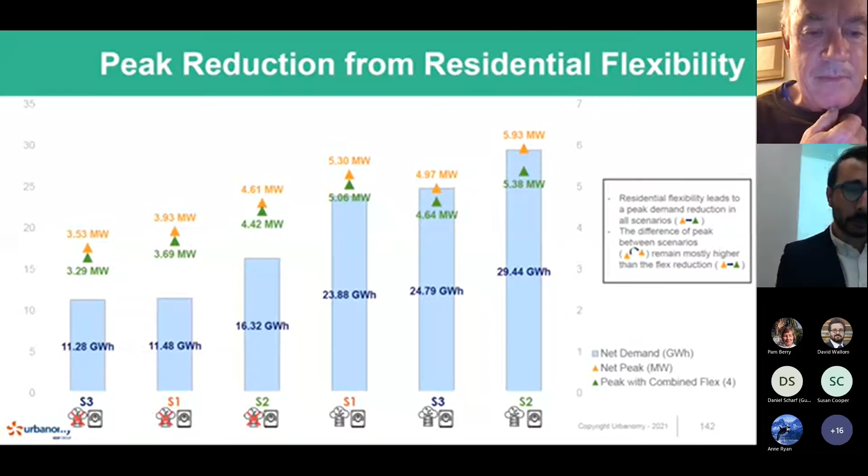But I just wondered what is the number that you've actually used to calculate these? Have you done it sort of per household or per person, or how do you get to the numbers? Yeah, thank you for your question. So we've done that per household. So if I come up to the building needs here, we haven't done it per person. So that's true. It could be a very good metric to break down per person because it allows to have something that you can compare. We've done here the building needs per dwelling and per square meter. So it's something that is generally used in the building regulations.

Today, when you look at the average energy needs for the buildings, you are much higher than that. You are around 150 to 250, depending on the type of dwellings. So it shows that basically already the efficiency of these buildings, or per household, because one dwelling is one household basically, is quite good, and compared to the average today, it's really low. This is the building needs. After that, when you transfer that into building energy demand, so what you actually use, there is the component of the behavior that Dave was mentioning, and the component of the efficiency of the system, which are the three scenarios that we've tested later.

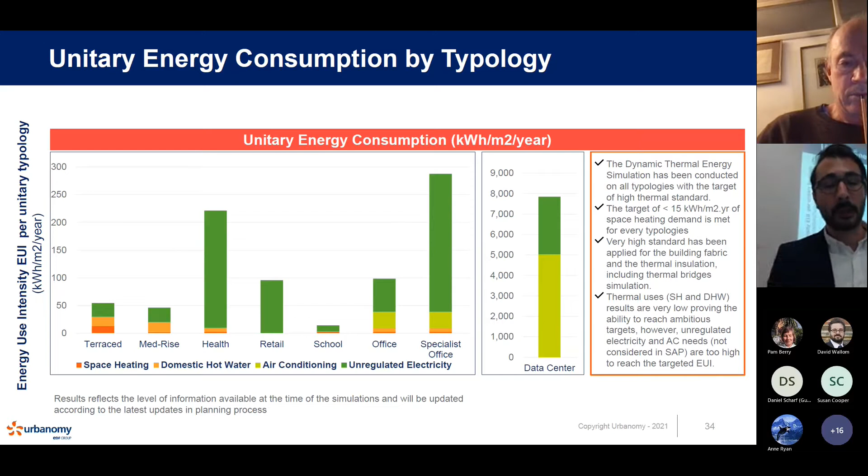So, sorry, it's a bit a complex answer for a simple question. The simple answer would be providing the data per person would be a good one. What we've done is we've looked at per dwelling for the energy needs and compared that with the current regulation.

Yeah, my concern is just that it would be interesting to have a carrot that actually encourages people to drive their energy consumption down, rather than the other way, which is to say we will provide you with all the energy you need, which is essentially your scenario, and you try and make that as efficient as possible, but there's no penalty, if you like, apart from financial, for the people to use whatever energy they want.

Yeah. Agreed. Then it can go through several ways, either in really engaging with the local community to understand, okay, what is your consumption? So that's what smart metering or understanding your consumption every day can help. You can have also some community schemes that allow you to self-consume as much as possible what is produced on site. So providing some communication and visualization of this self-consumption is also a good way to engage people.

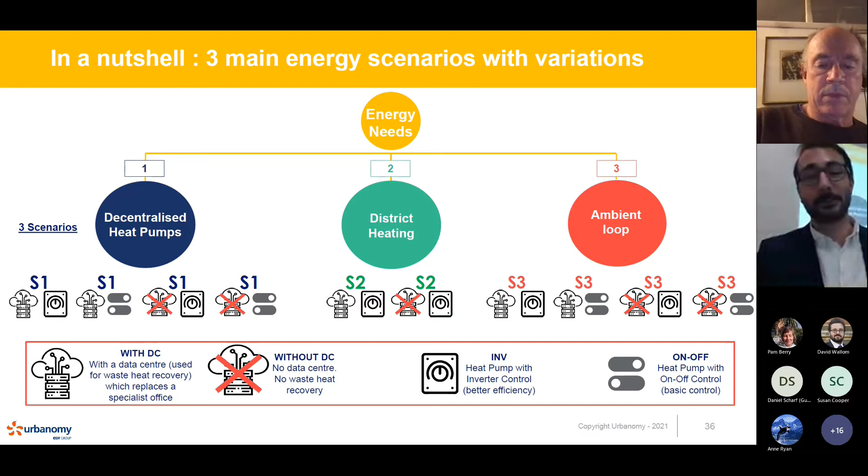Just one observation is sometimes you can actually keep some of the value of community energy within a community, and that can be a motivator and a driver on its own, even if you don't reduce energy consumption.